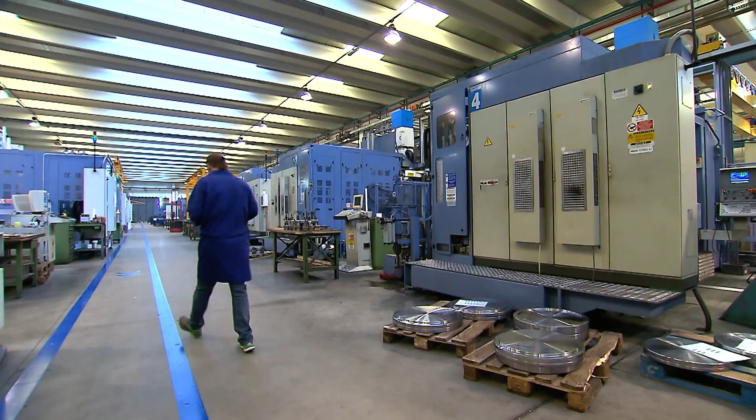Phoenix International was formed in Italy in 1972 in Paderno, Franciacorta, thanks to the far-sighted vision of a group of young entrepreneurs who wanted to share their expertise and experience in the aluminium extrusion sector. Their mission was to create an independent and innovative company focused on a core business marked by significant growth potential.

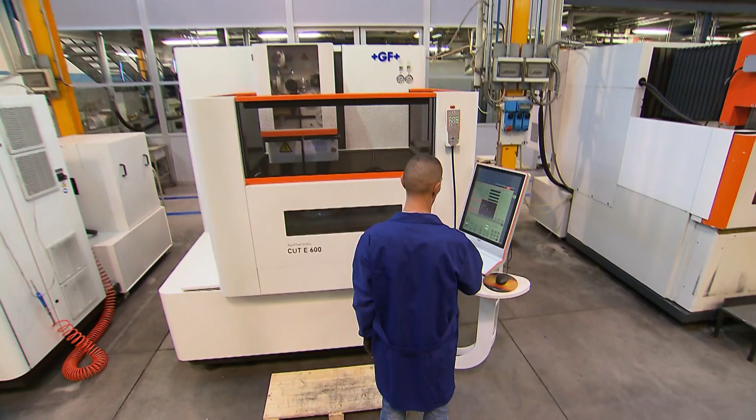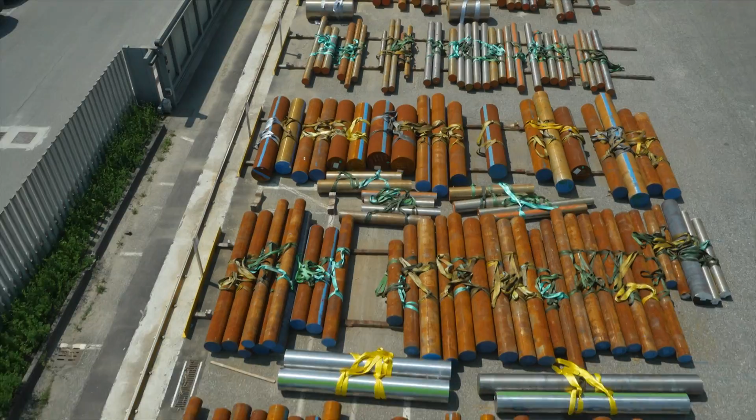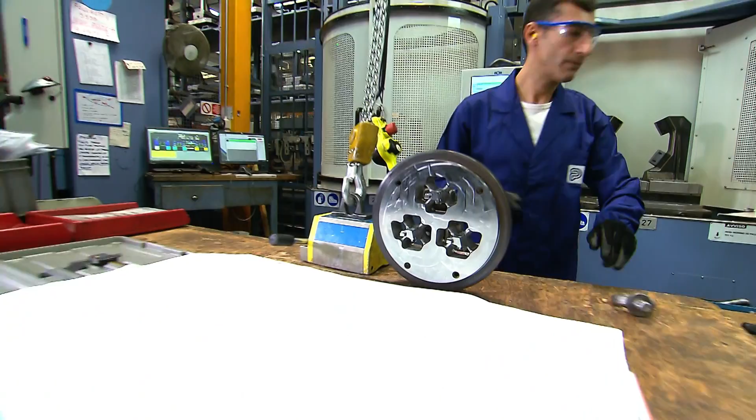Phoenix later moved to its new premises in Verdello in Bergamo province, where it maintained its organization up to the late 90s. In February 2016, the company's original founders and shareholders, together with a private equity fund, sold their stakes to a prestigious French fund rooted in the continent's major economies, through a transaction carefully planned over time and aimed at anticipating future international scenarios.

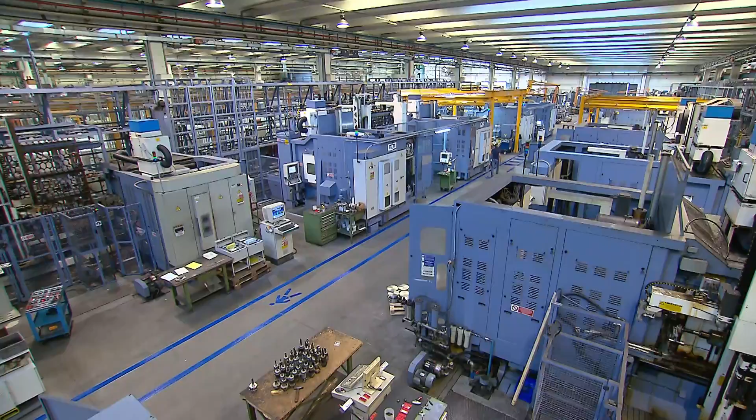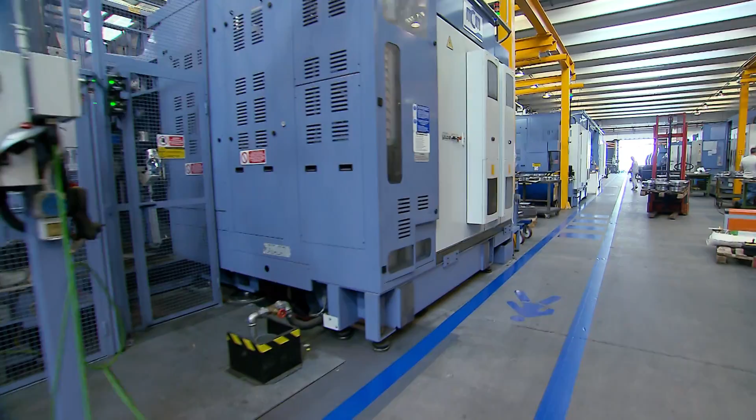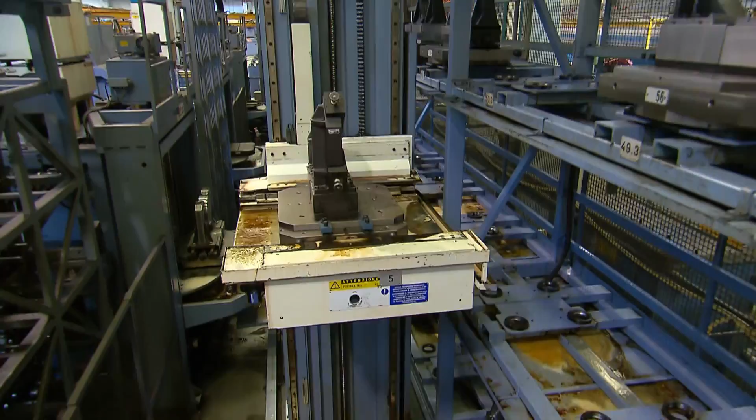Phoenix is traditionally focused on exports. Today, over 50% of its turnover is generated on foreign markets, mainly in Europe. Although sales and production resources were originally concentrated in the building sector, with the passing of time, demand gradually moved to the industrial sector, and precisely to the mechanical field in general, embracing pneumatics and electronics, as well as the automotive and other transport sectors: high-speed and underground trains, trucks and buses.

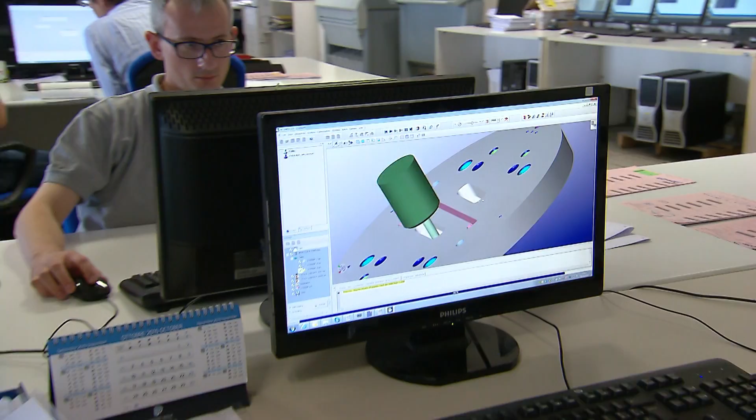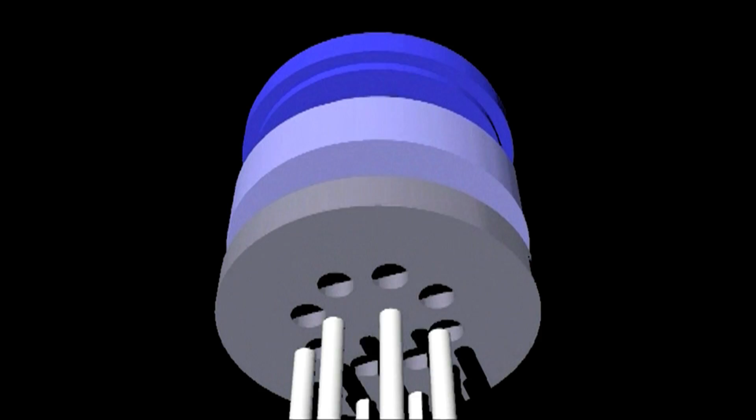Way back in the 80s, Phoenix started to work with the design and modeling system for 3D solids, and in recent years has always been one step ahead in the market with the introduction of tailor-made extrusion simulation packages. Advanced research in the simulation field has allowed special-purpose tools to be developed for optimizing design work, both to reduce lead times and to assure that the customer receives an increasingly high-performance product. This process led to the development of dedicated flow balance and automatic bearing calculator software.

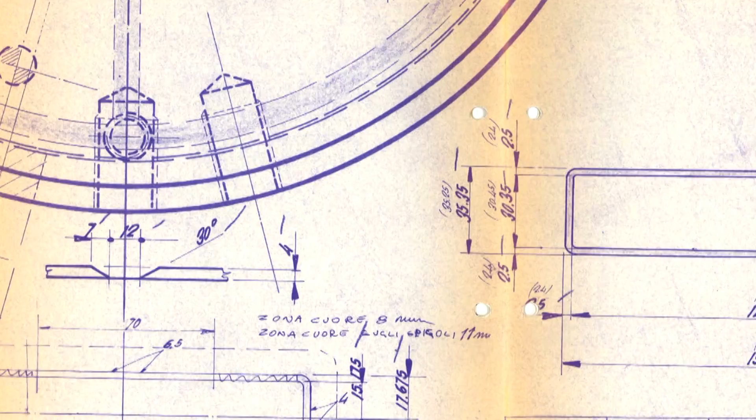In the 60s and 70s, the die was a genuine work of art, almost entirely designed at a drafting table and then expertly crafted manually on the first machine tools. Today, the very high quality demanded by customers has led to a completely different product, one with the highest levels of quality and precision.

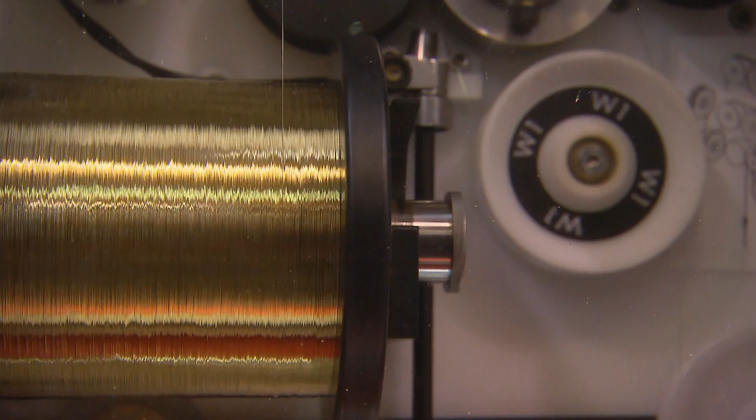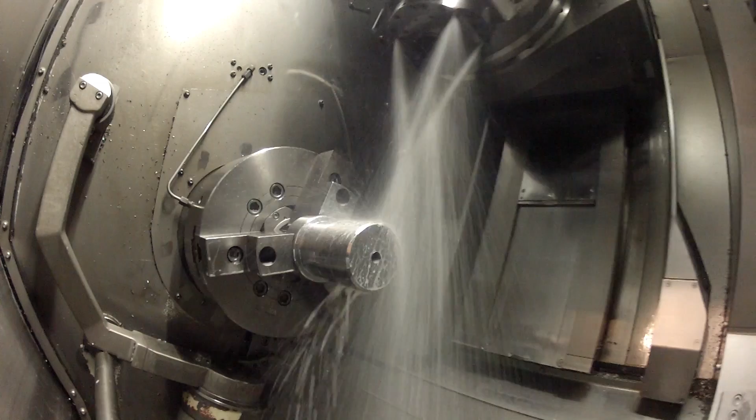Starting with high-performance steels, right through to extremely futuristic designs and virtually unlimited working possibilities, such as 5-axis and high-speed machining, up to special high-tech coating, dies can now meet the most challenging requirements.

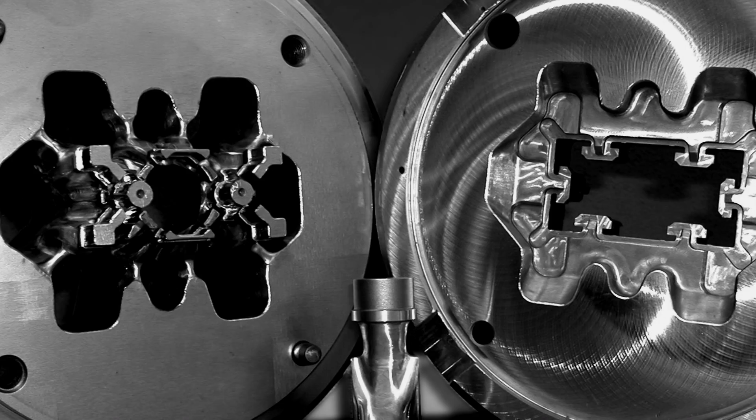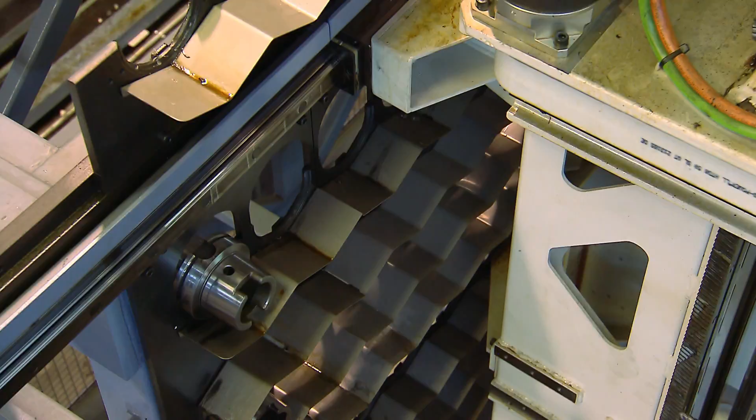The production cycle of a die starts with the order and ends when the finished piece is sent to the customer. Between these two stages, a complex production cycle takes place, during which all the experience acquired by Phoenix over the years converges, leading in just a few days to the end product being ready for delivery to the customer.

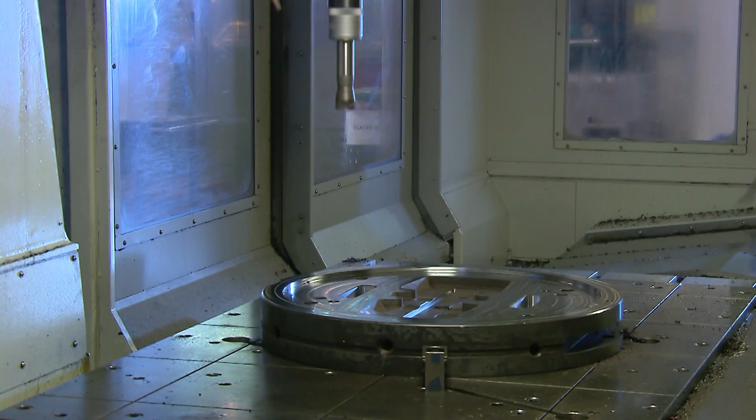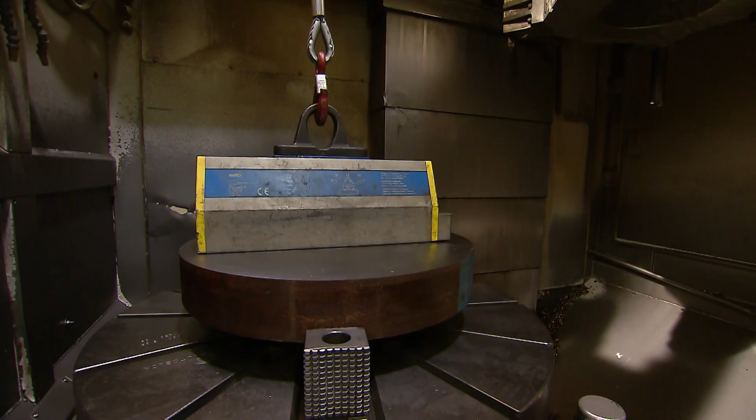The phases are: customer's order, CAD project, cutting and turning of special steel pieces, CAM for individual pieces of the die, milling phases, wire and spark erosion, high-speed milling phases, heat treatment, handmade finishing and thorough check of each detail.

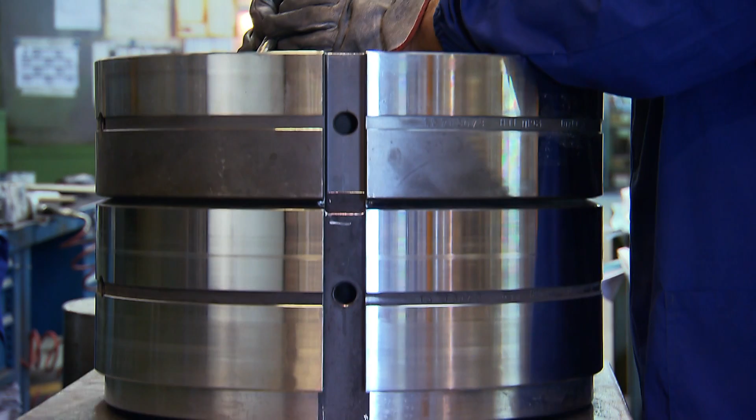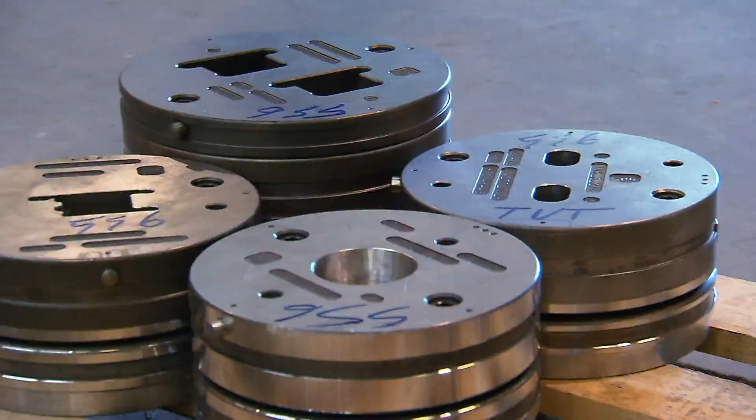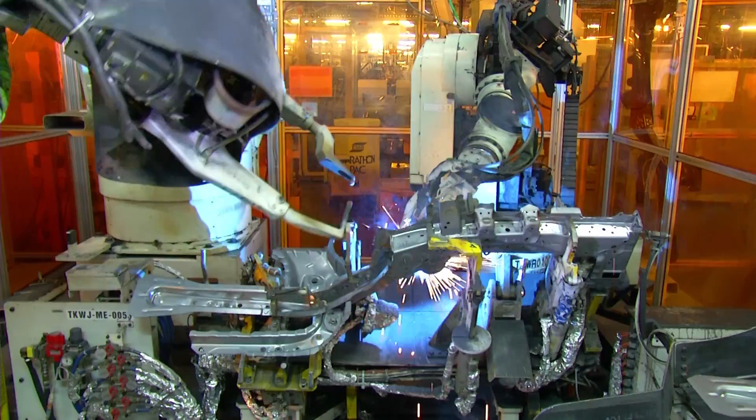The finished product is now ready to enter its production life cycle and extrude its aluminium bar at the highest level of performance. Phoenix has always been a pioneering company in the research field. It is in this area that the innovative 3D scanner has been introduced, bringing a huge competitive advantage, particularly in the automotive sector, where the requirement for absolutely identical pieces must be met.

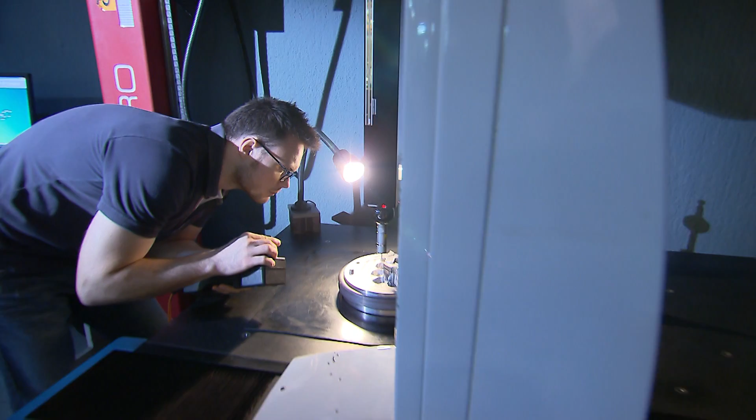Since the beginning of the 90s, Phoenix has been an ISO 9000 certified company. It has always been interested in assuring its customers total quality with regard to the product, its conformity with the design agreed with the customer, the optimal extrusion of the profile, as well as the required tolerances.

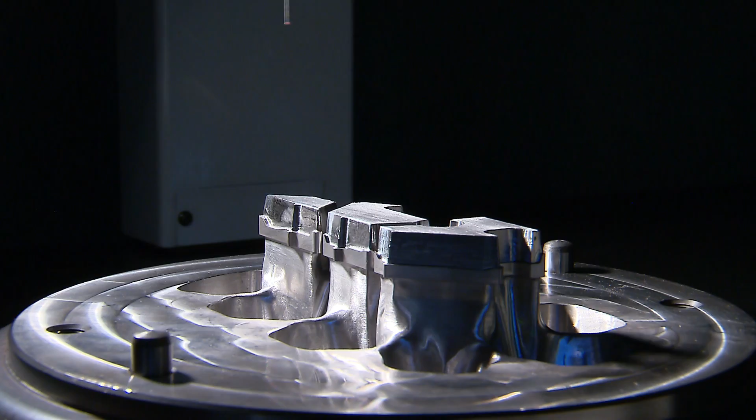However, quality is also the ability to find alternative solutions more suited to the customer's needs, the guarantee of competitive lead times and compliance with agreed delivery dates. For Phoenix, all of this is true quality.